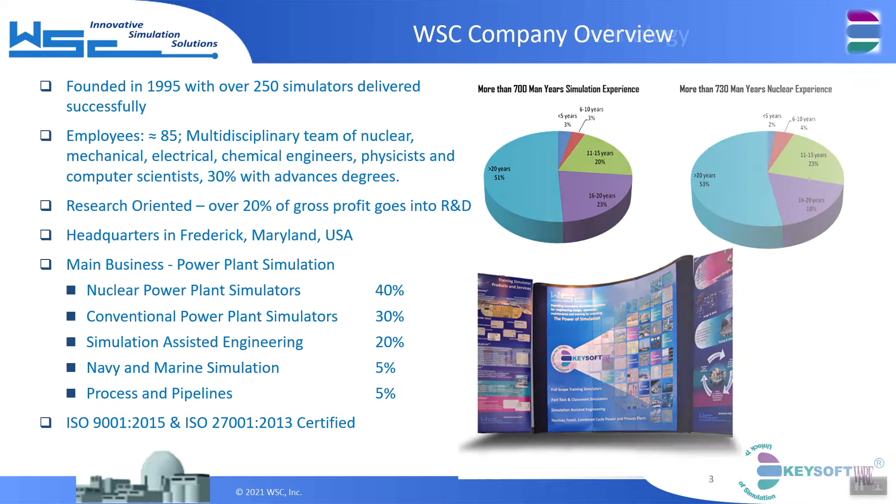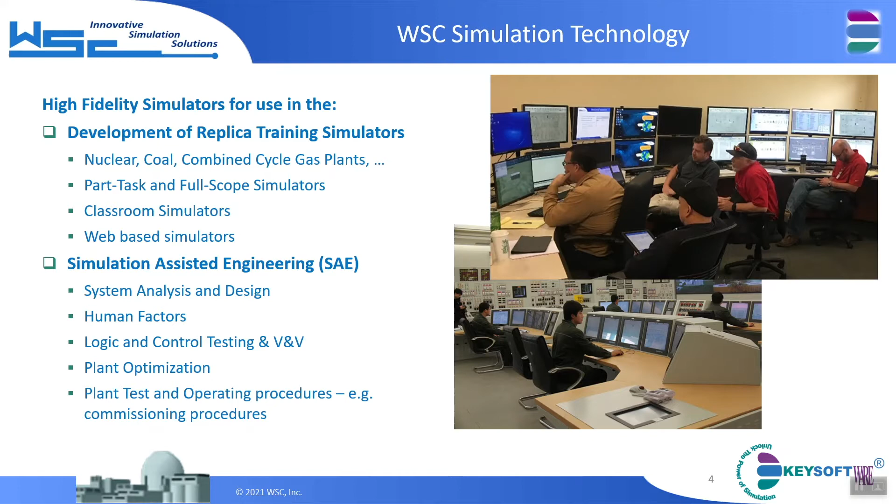Our business also includes the use of simulation in design. Companies such as GEH and others have used the simulator in system analysis, human factors, I&C, DCS, V&V, and plant optimization and procedure development.

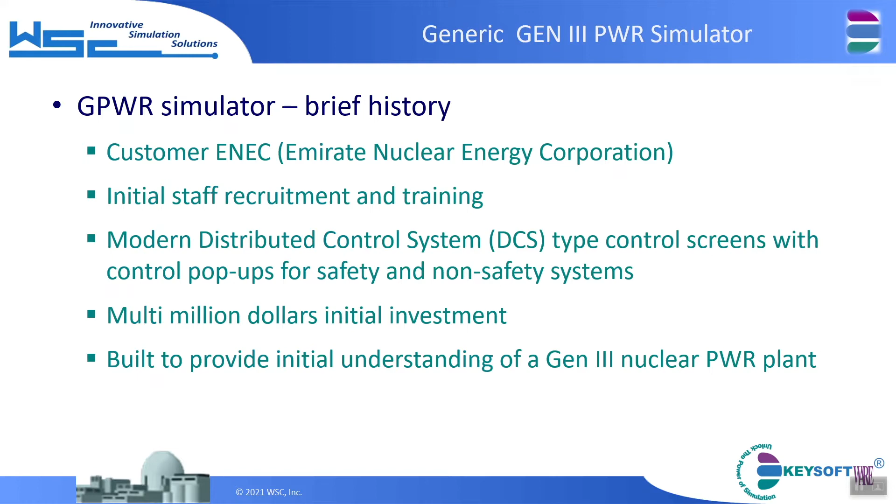The history of the Gen 3 PWR: we developed it for ENEC, NAWAH, in United Arab Emirates initially, with a multi-million-dollar contract, and this was due to them needing a simulator before their custom simulator, which was also built by us, was delivered. So we had to convert a traditional nuclear power plant control room into a DCS type control room. This was replaced by the actual nuclear simulator that you see here, and currently they have 4 of these nuclear simulators due to the amount of operators they are training.

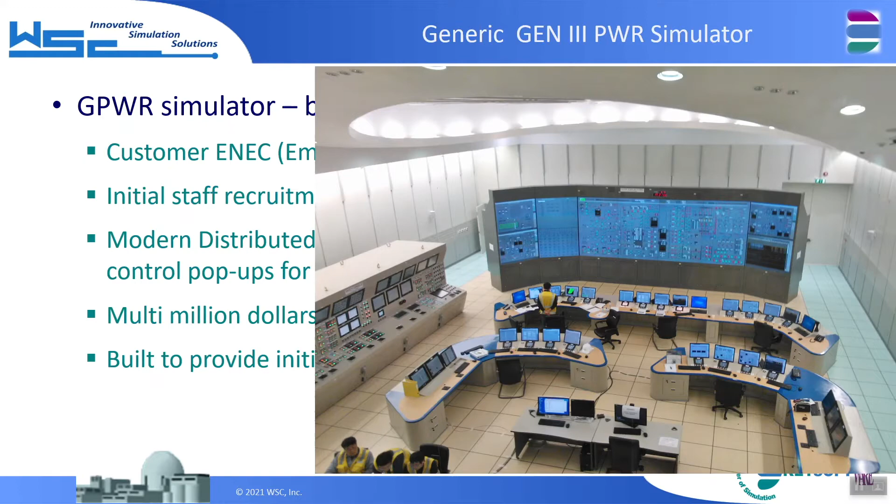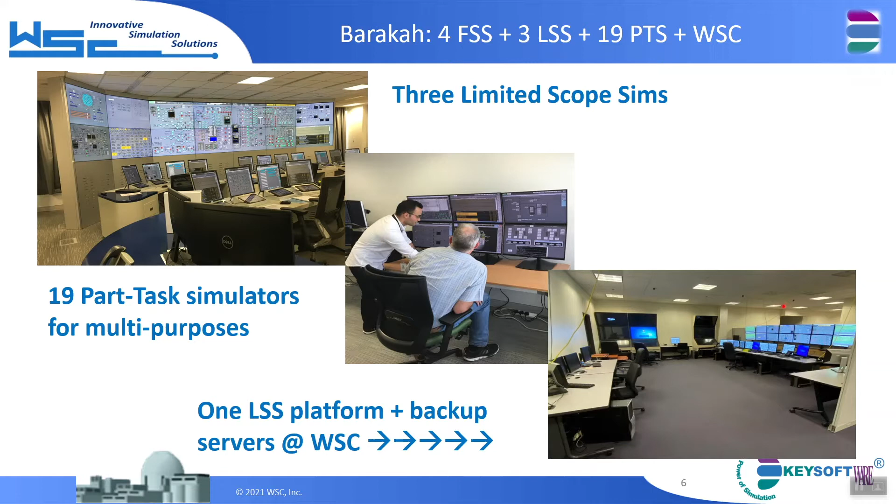For Barakah nuclear power plant, there are also multiple simulation platforms. There are limited scope simulators, which you see on the top left. There are engineering simulators called part task simulators that allow for system understanding and also debugging of issues in the plant. We also maintain a platform in WSC for them where we do upgrades.

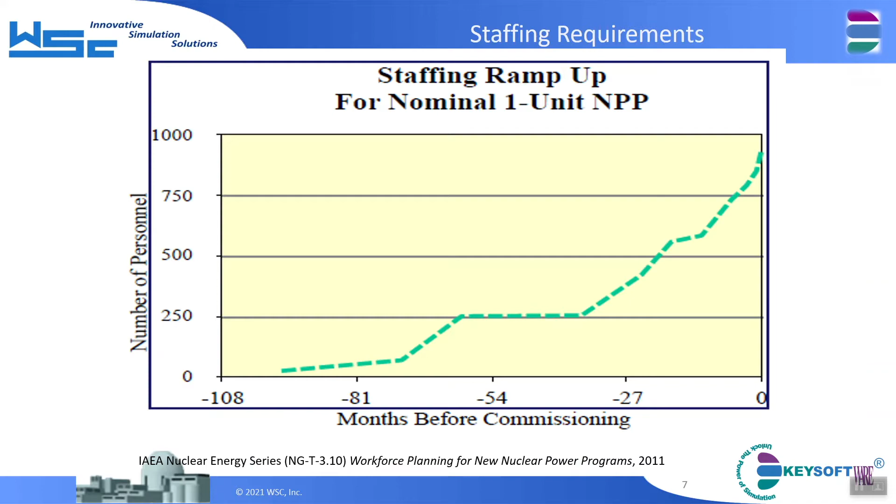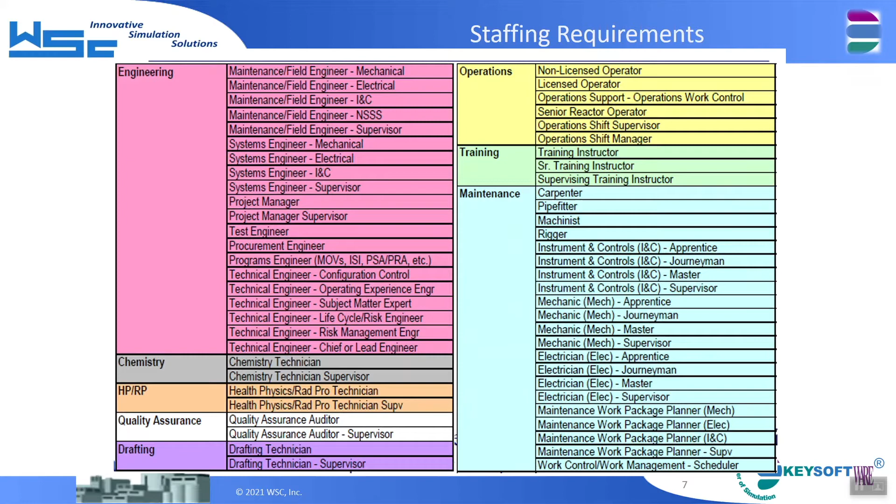And continue upgrading the simulator to the same state as the plants. One of their most problematic issues is that they had started the nuclear program and required hundreds of employees to be trained on nuclear technology. And it's not only operation, but engineering, even management and maintenance, etc. So that required ways of educating, recruiting, and getting the next generation of engineers into the nuclear industry in United Arab Emirates.

The capabilities of this simulator is that it is a modern Gen 3 control room. It provides a very good understanding of the nuclear systems and fundamentals, and it can take you to any component in the nuclear power plant and provides the ability to operate, control the plant, and look at transients, understand fundamentals of nuclear power, and introduce nuclear safety culture in the plant.

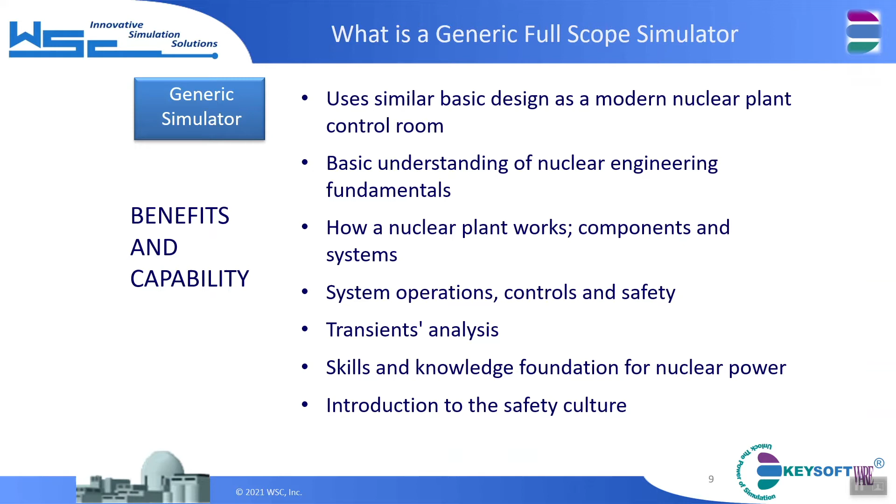What differentiates our generic PWR from others is that the controls of this generic PWR are all done through graphics rather than panels. What we have found through providing panel simulators is that students or operators have a hard time finding equipment in a panel. It takes years to understand a panel control room, whereas in the generic PWR it's very easy to access different systems, different controls within any system in the plant.

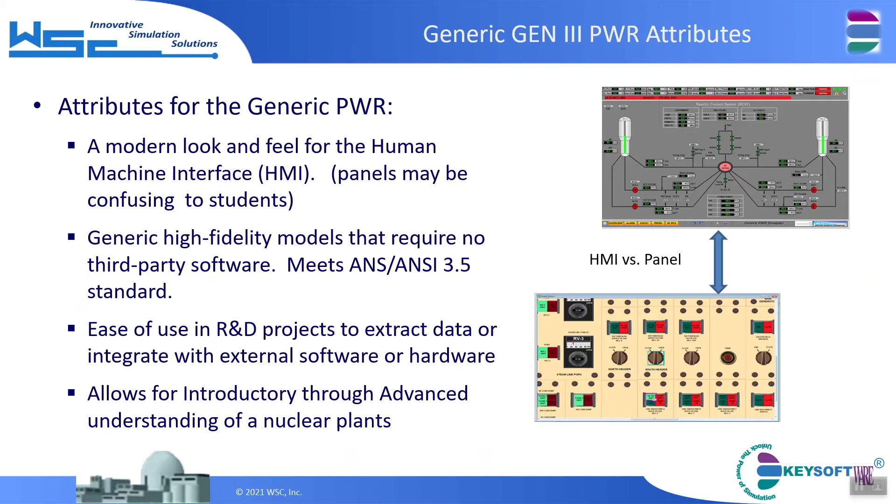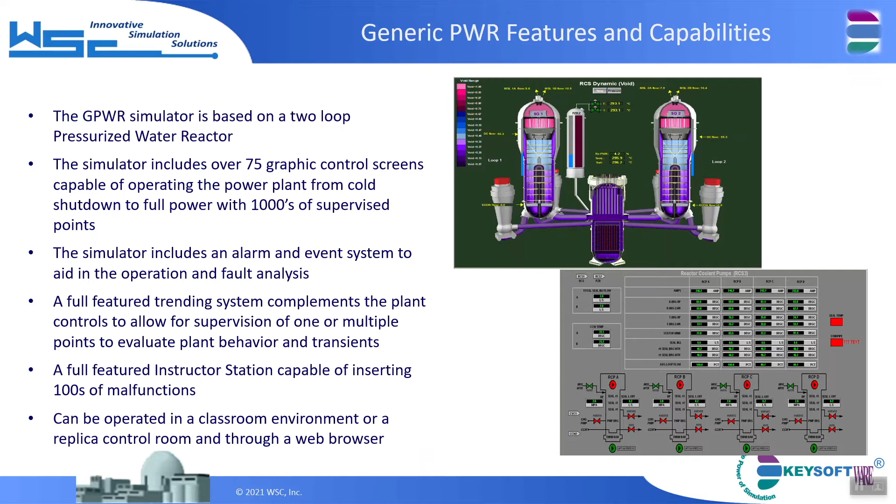The GPWR includes about 70 to 80 graphic screens that allow you to operate the system. It includes an alarm system, an event system, trending, a full instructor station, and it can operate in a classroom as well as in a single platform or a web-based delivery.

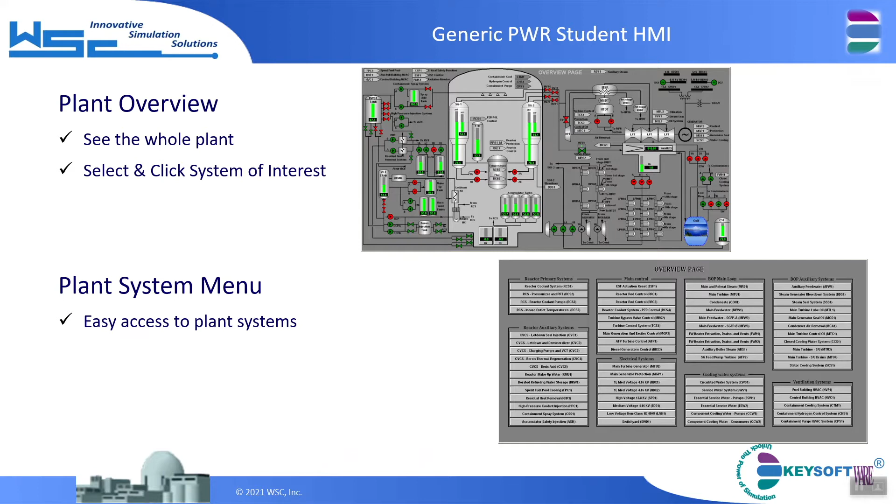Some of the plant overview screens: this is the top screen with the full view of the plant, as well as the screen with the menu taking you to any system in the plant.

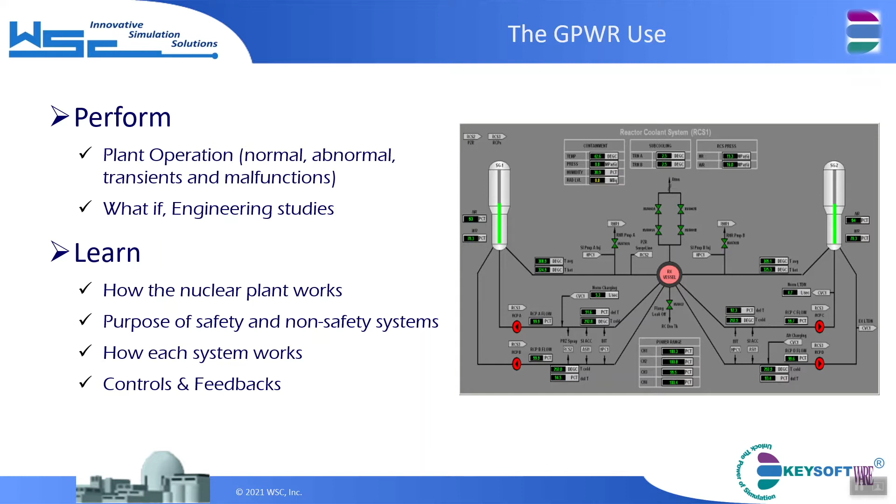The simulator is able to do normal operation from shutdown to 100% power and back to shutdown, but it also allows for malfunctions to be inserted and changes to the plant that are needed for various R&D or other applications.

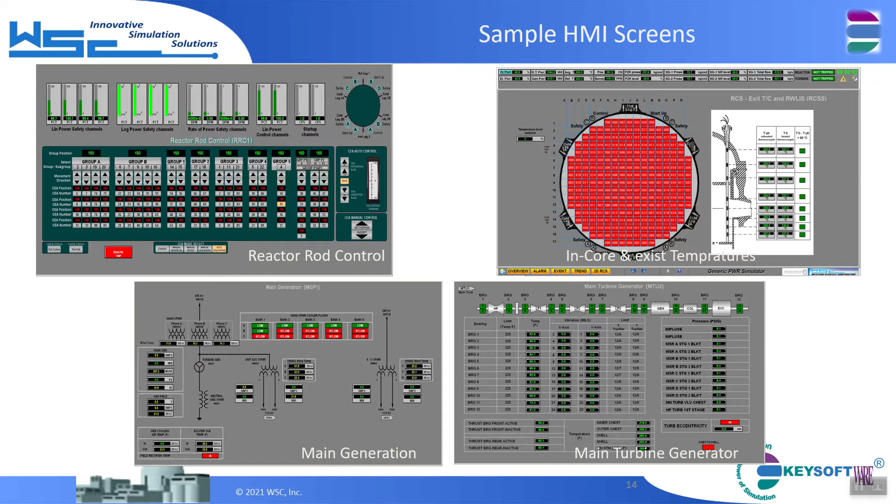Some of the HMI screens: this is rod control, in-core exit temperatures, main generator, and turbine generator vibration monitoring. It has an alarming system, an event system, and a trending system.

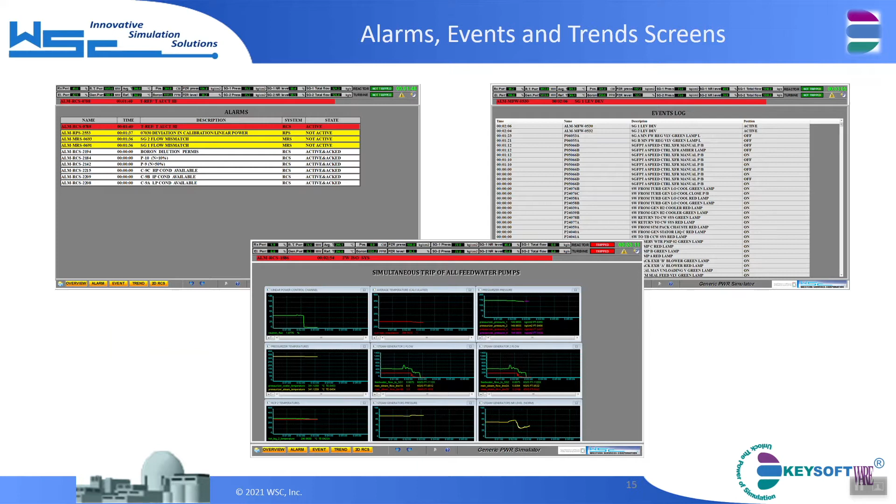And we added certain quasi 3D graphics to provide the user a view of void, pressure, temperature of the reactor, as well as the flux in the reactor through the 3D model that is provided. This model is based on NESTLE code, and it's a 3D full scope neutronic model.

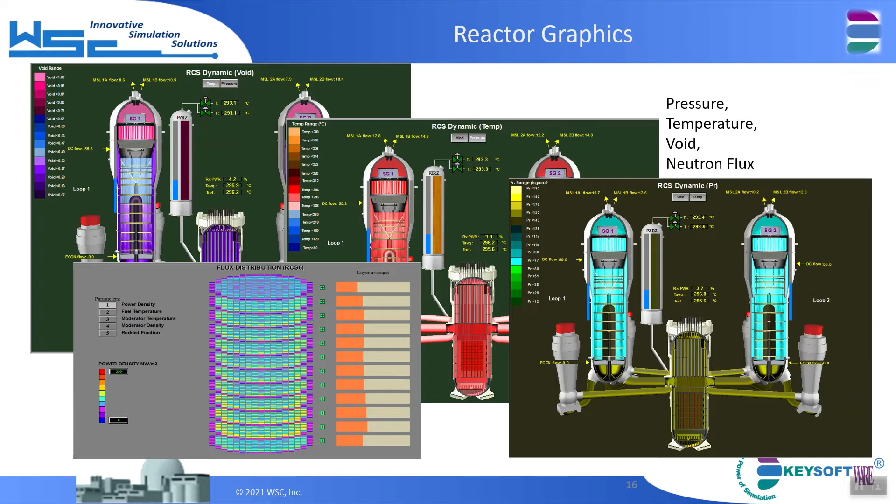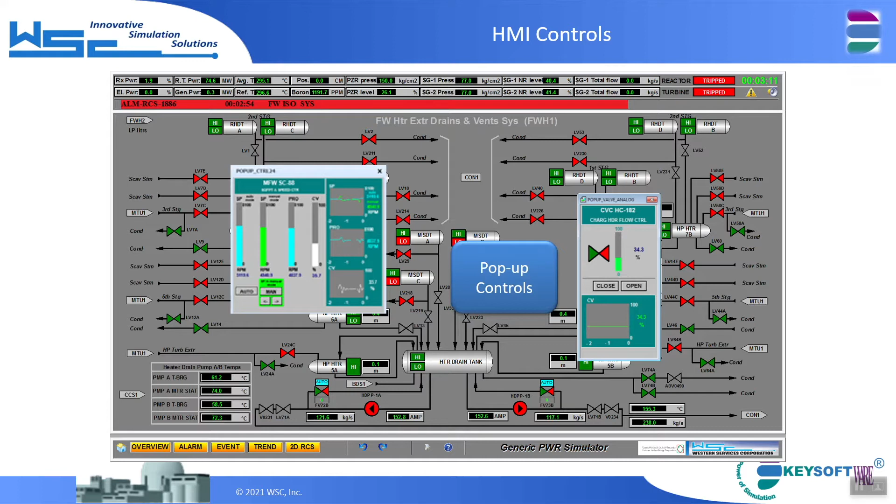The pop-ups are very simple to understand. You click on a valve, and it opens and closes. You click on a controller and you'll see the PID controller with its parameters, trended, etc.

Also, the simulator comes with a full instructor station, which allows for use of the simulator in training, and allows for insertion of malfunctions, snapping initial conditions, etc.

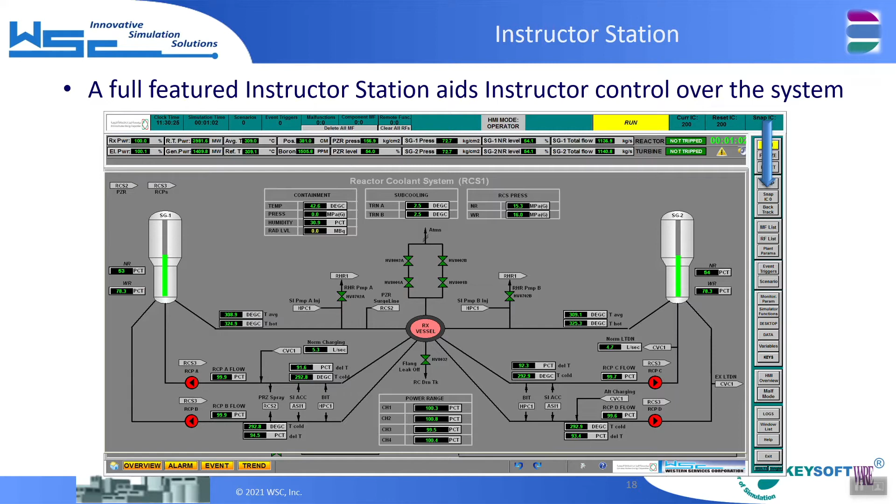This is some view of how this simulator was applied in a classroom. The top right is something we delivered through the IAEA, International Atomic Energy, a few years ago to countries that are starting to think of nuclear power as a source of energy in their country.

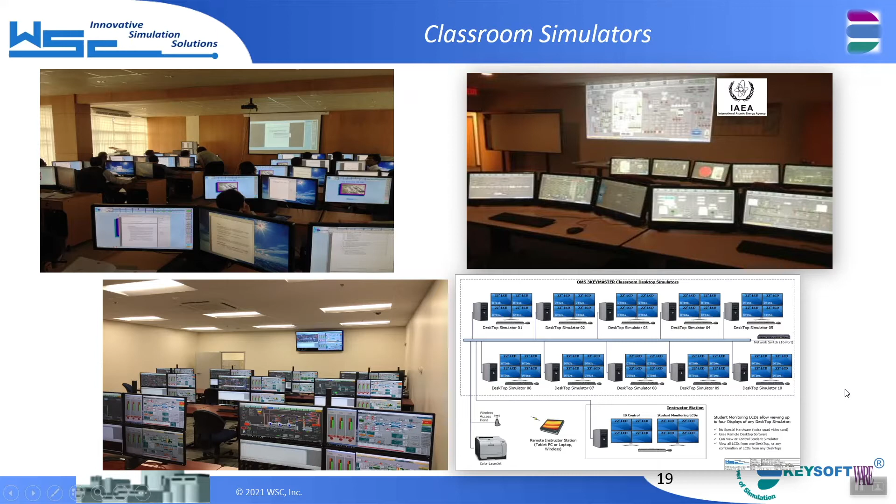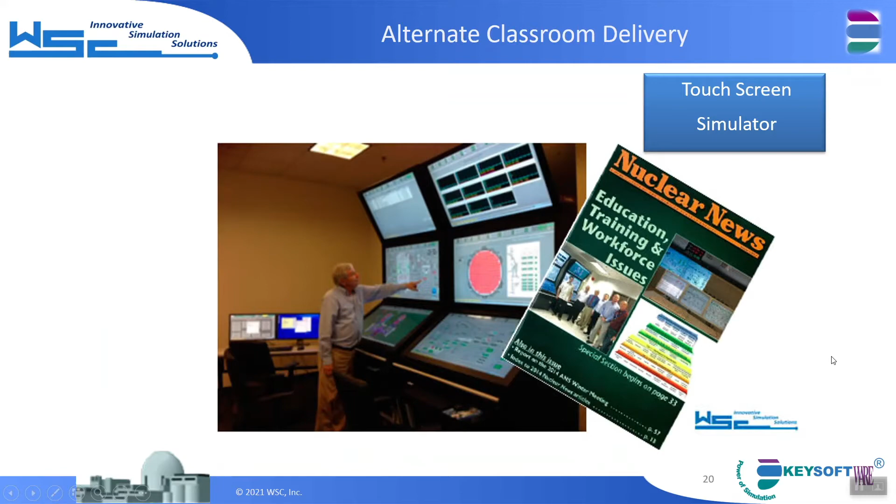We've also delivered the simulator on panels. These are called 3 key touch panels. We were on the cover of Nuclear News maybe a couple of years ago. Mr. Mirsha was one of the people in the picture delivering this simulator to a college.

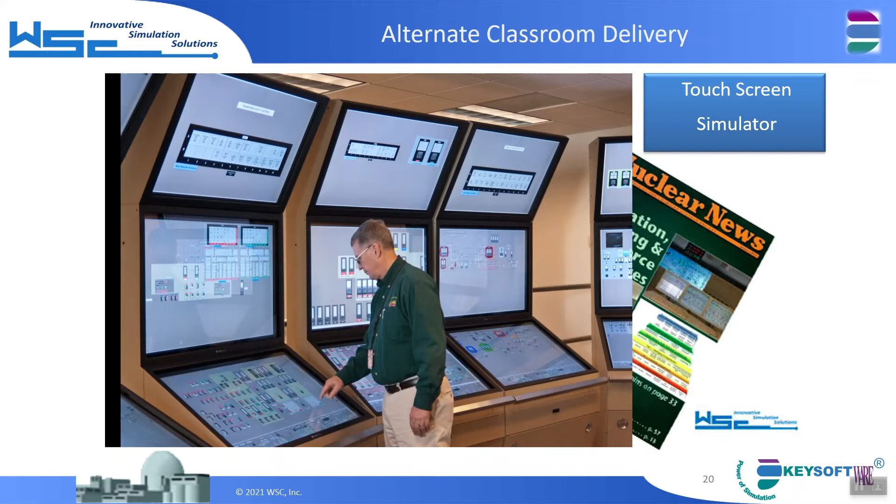We've delivered these touch screens on traditional control rooms, such as this one, which is Palo Verde. In addition to that, we recently have been delivering this on cloud computers, allowing students to access the simulator through the internet.

The color scheme that you see with yellow, green, and red just indicates that different lessons can be run by different people. Access to these lessons is independent of what lesson you are taking.

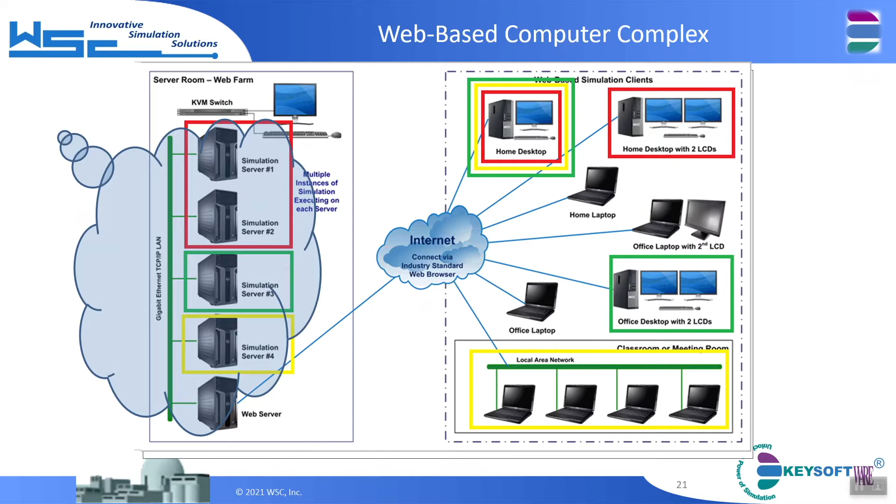Where the simulator is sitting today, some of the organizations that have it and use it, whether it's on the web, local computers, or a classroom environment - these have been various ways of delivery. Some of them have been also for R&D purposes, where the simulator is being used for certain research and development.

What we deliver with the simulator is this 3KEYMASTER simulation environment, which includes all the modeling tools, a two-phase flow-based network, an electrical network, a logic control, as well as the DCS HMI and Instructor station. It includes the Nestle code for the neutronic reactor physics, and it's available in various versions.

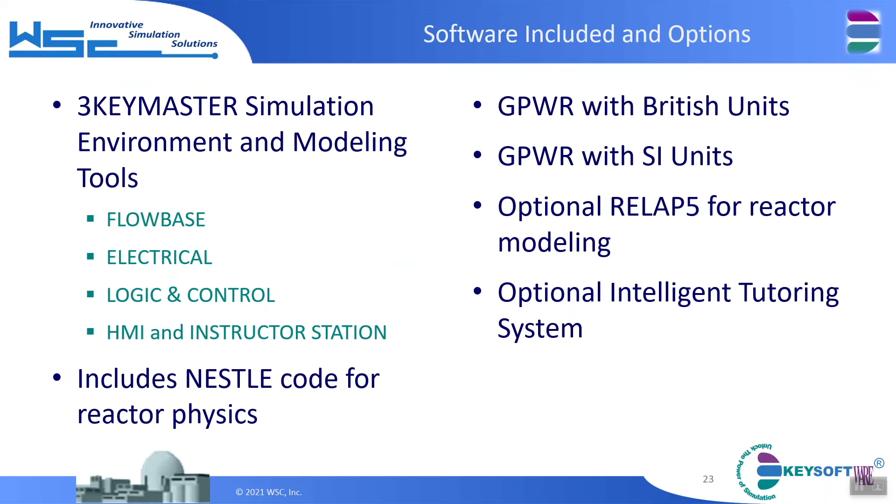The GPWR has a British units version, an SI unit version, and optionally we can provide it with RELAP 5 as the thermohydraulic code, along with what we call the intelligent tutoring system, which we will demo later in this presentation. So the simulator can be provided in a single machine for use in R&D or control.

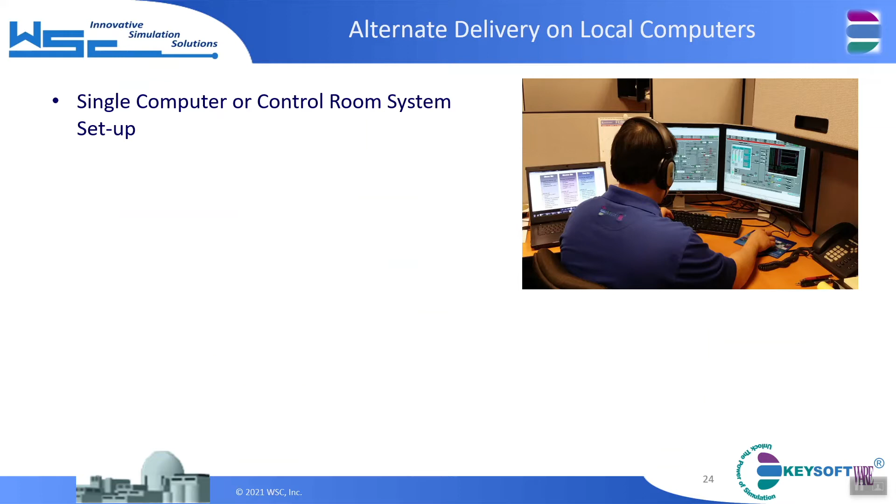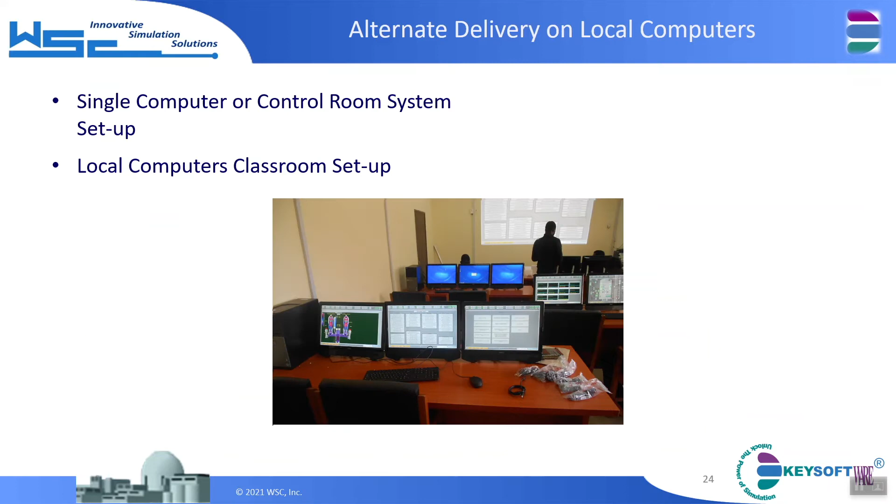Or a control room setup such as this one, or a classroom setup, or through 3-key touch units, or a combination of both. This picture comes from Sharjah University in the UAE, where they have a classroom and the 3-key touch units. 3-key touch units are usually used by the instructors to provide feedback to the students.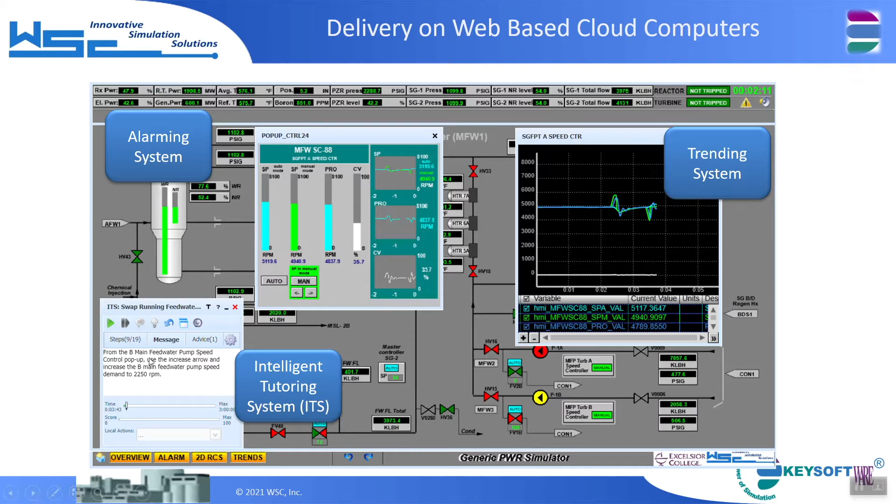The latest delivery through the web allows you to have access to it from anywhere in the world, including functionality such as trending and control. So you could actually do a startup of this plant through the web and see alarms and listen to the script of the lesson through the intelligent tutoring system.

The intelligent tutoring system was developed a few years ago under an EPRI contract and has been used recently in our web applications to deliver lessons through the web that are scripted, allowing someone to come into the web and follow instructions for the simulator.

With this, I'm going to turn it to Majid, and he will do a few demos for us. Basically, he will go through the GPWR functionality and take you to the GPWR on the cloud and show the ITS capabilities.

Greetings. To start the GPWR, I basically log in. I can log in as a developer, where you have access to models to make changes to the GPWR models, or you can sign in as an instructor, which allows you to control the simulator and/or operator students, and so on.

And if I select the instructor, the simulator is fully up and ready to be used. I go ahead and run. If I bring another...

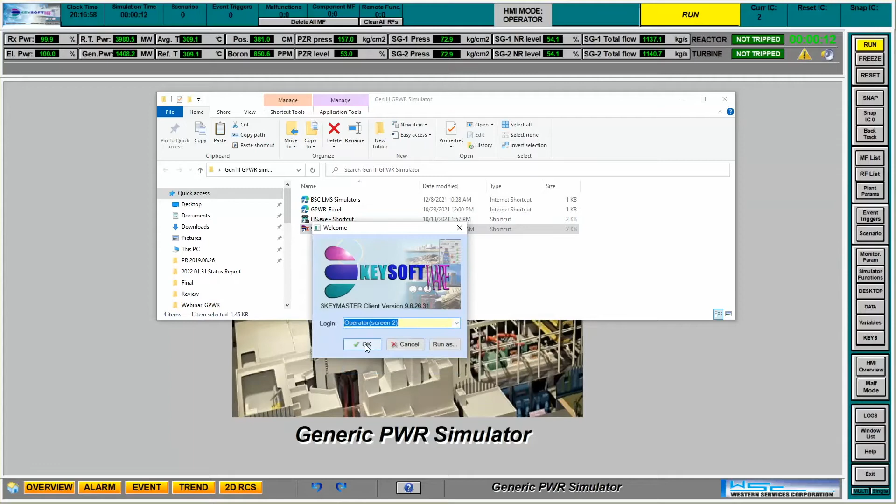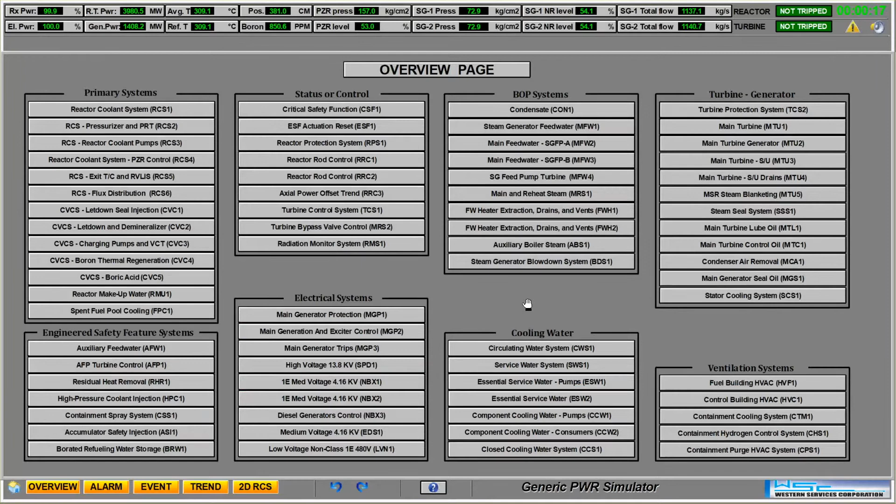If I sign in as a client or as a student, I can connect to this simulator. For example, if I select this, I bring another HMI that I can control the simulator from. You can open up as many of these for teamwork or in a classroom environment.

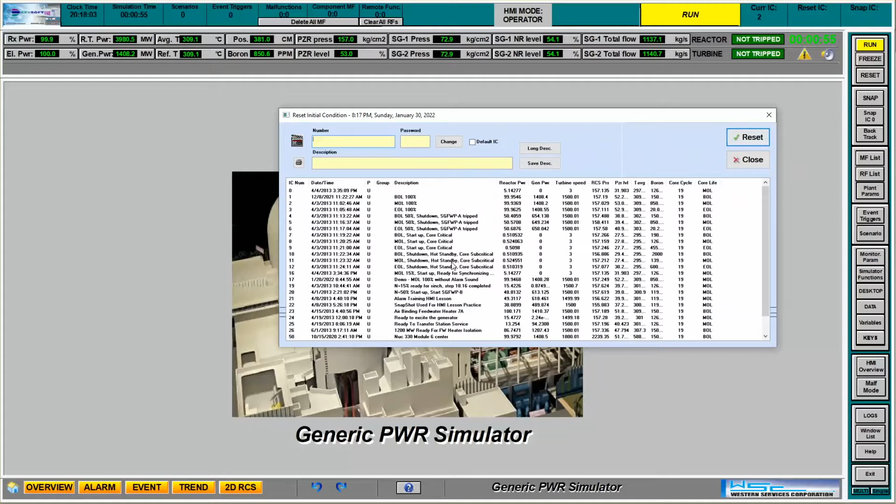Now, if I choose the initial conditions of the plant, there are many initial conditions, or we call it ICs, provided for different core lives, but you can snap any initial condition that you like for running your own scenarios. I reset to an initial condition which has no alarms.

No alarm sounds basically, and I'll choose an overview, put the simulator into run.

The middle is the main HMI page to operate and control the plant. The important parameters information are here. So you can see the status of the plant, and whether reactor and turbine are online or not. And here you can see if you are running scenarios or having malfunctions, leaks, or component malfunctions.

Here there is a facility basically - to the right is simulator control and facility for instructors and the users. And on the bottom there is a home, a menu, a list of HMIs, and there is alarms, events, and trends, and 2D primary system presentation, which I'm going to show some of these to you.

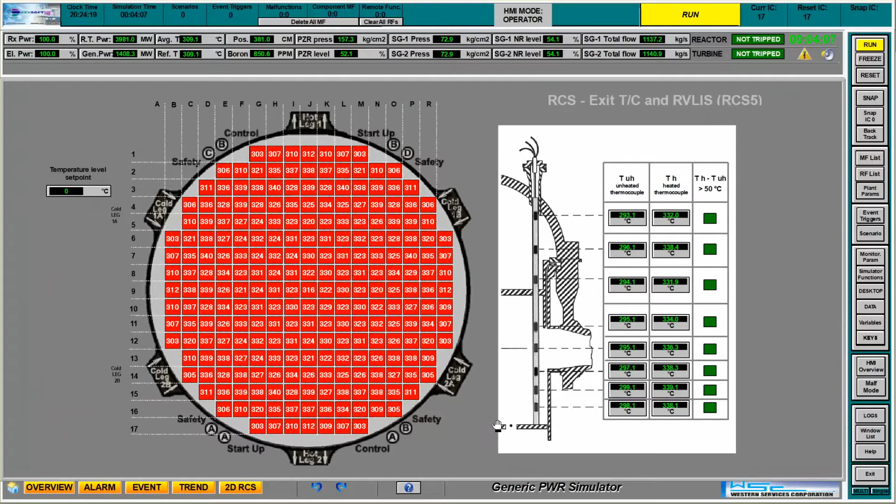Clicking home, you will see basically all the HMI pages are organized by their systems or functions. Like these are the primary systems, controls, and statuses, balance of plant system, turbine generator, safety, electrical, cooling water, and ventilation. So from here, you can click on diagrams to HMIs and operate.

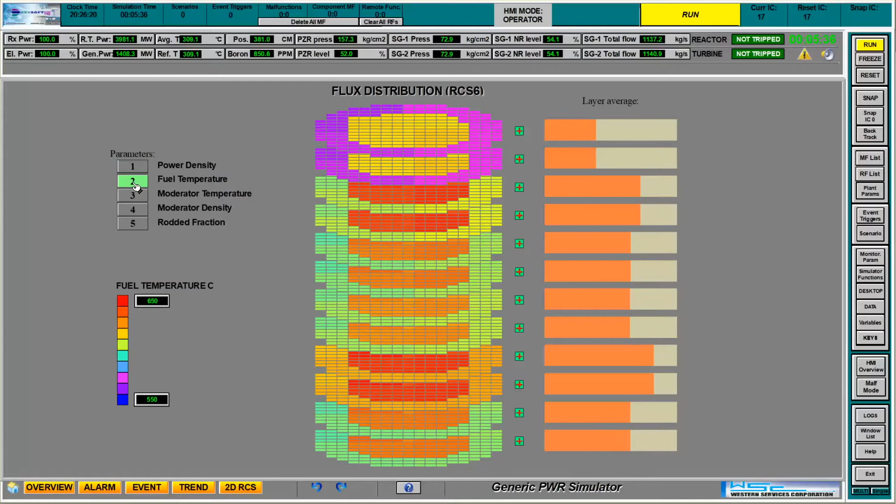For example, the flux distribution - what you're seeing here, basically, we're using Nestle core modeling. So every one of these nodes is calculated in the core model. That's the flux shape, in the middle of life core. You have the power density indication, fuel temperature, moderator density, and then a rodded fraction, meaning all the rods are out of the core.

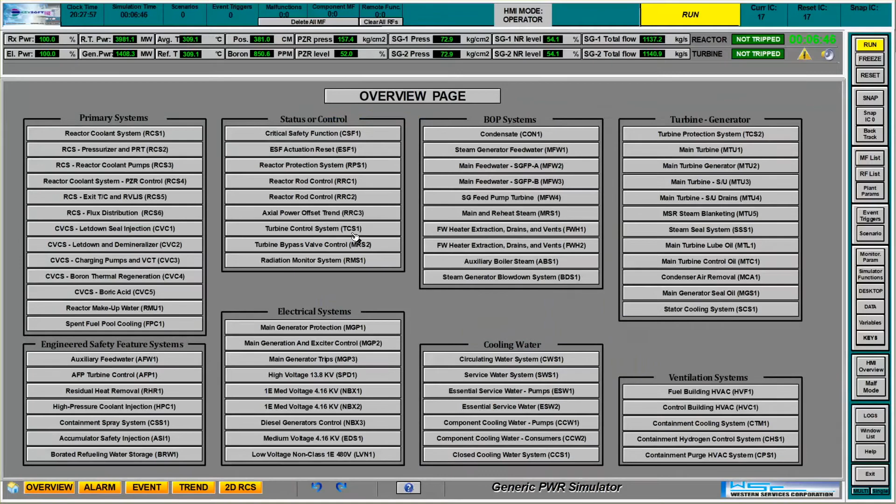On the controls, I'd like to show the reactor rod drive system or reactor rod control. Right now we are in automatic. If I select manual group and group 3, I can insert the rods. You will see the rods are stepping in. And if I trip the reactor, you will see the power indications, and you're also going to see the rods getting inserted in the core.

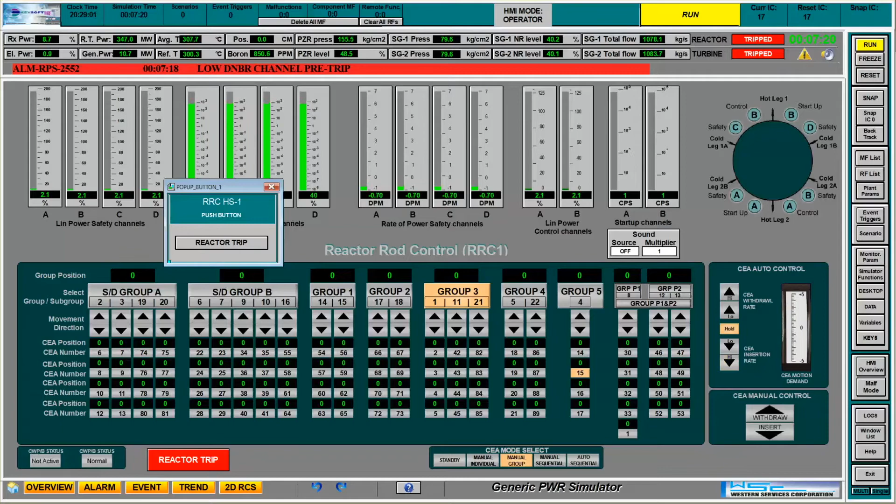So if you look at the trends, for example, you will see basically the trends indicating that the reactor has tripped. Resetting to 100% again.

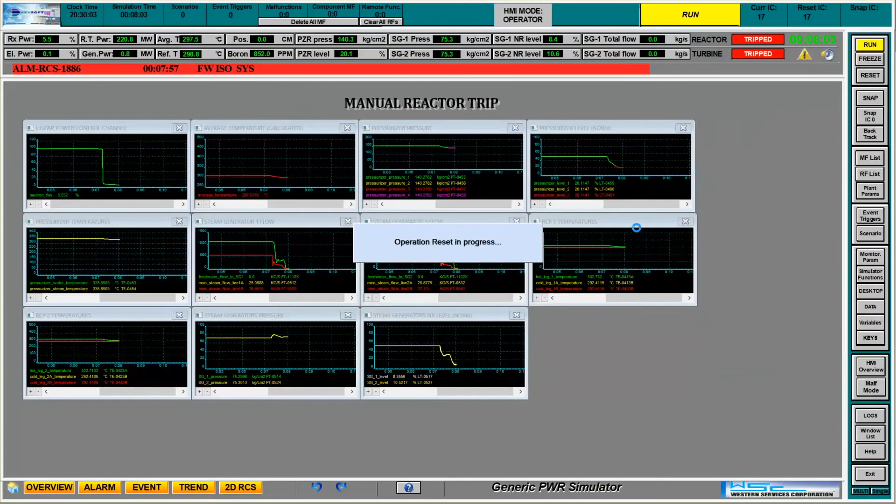Show you the backtrack. Basically, the simulator is snapping automatically initial conditions based on user specified interval. So if you're running a long scenario and you want to go back in time to show the students or observe yourself the situation, you may go back in time.

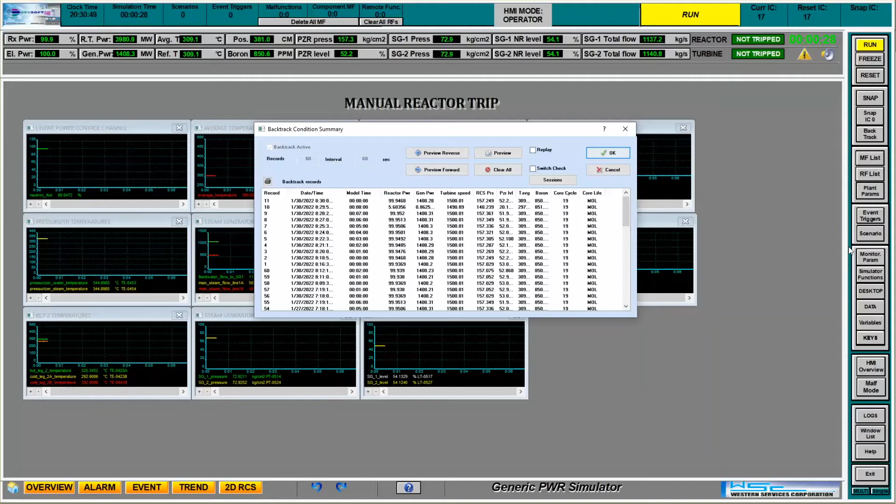We have a very good 2D representation of primary system, a good visualization of the primary system.

Let's insert a malfunction, loss of coolant. We go into the malfunction list and select primary system malfunctions. If I select the cold-leg break and put, let's say, a delay time of 5 seconds, ramp time of 7 seconds, and the final value being 50% break, you will see that it's counting down by 5 seconds, and then the malfunction gets inserted.

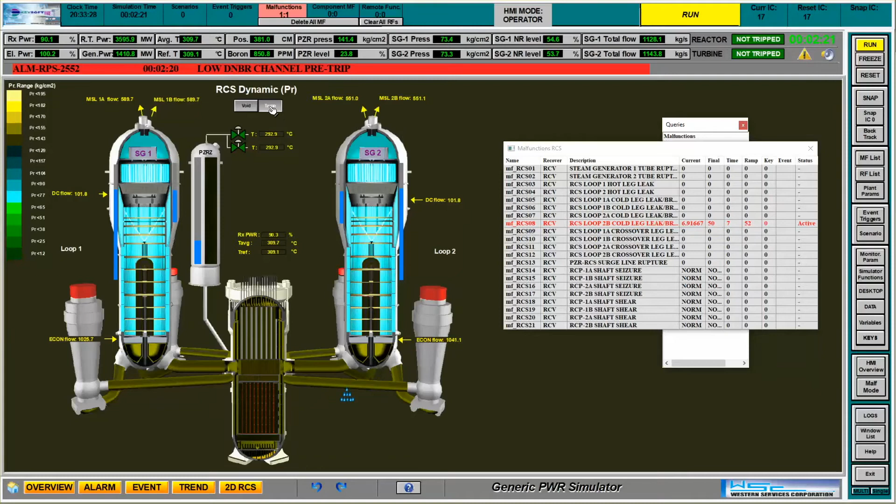The malfunction is here in the cold leg. You will see that the pressure drops in the primary system. You will see the temperatures are changing in the primary system accordingly, and the void.

Another function that I wanted to show you - the user can make a list of parameters that they are interested to look at for different transients, and we call them monitor parameters. So if I select a few of these, for example, I can trend them.

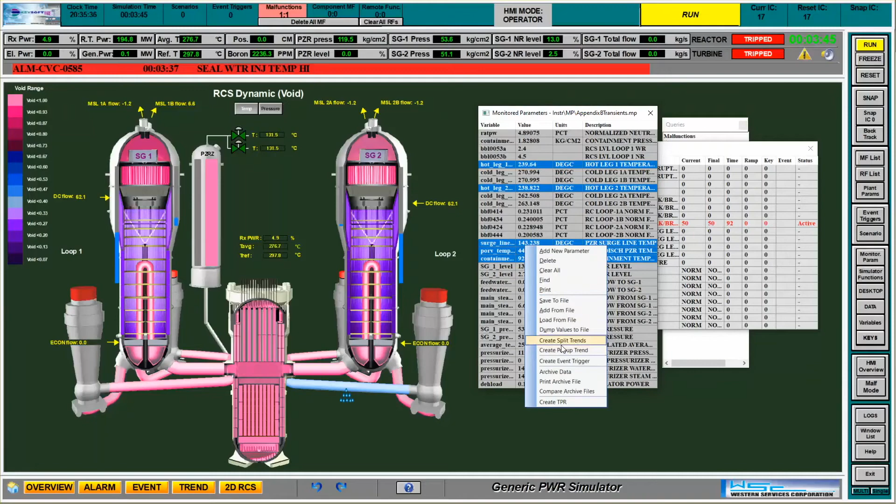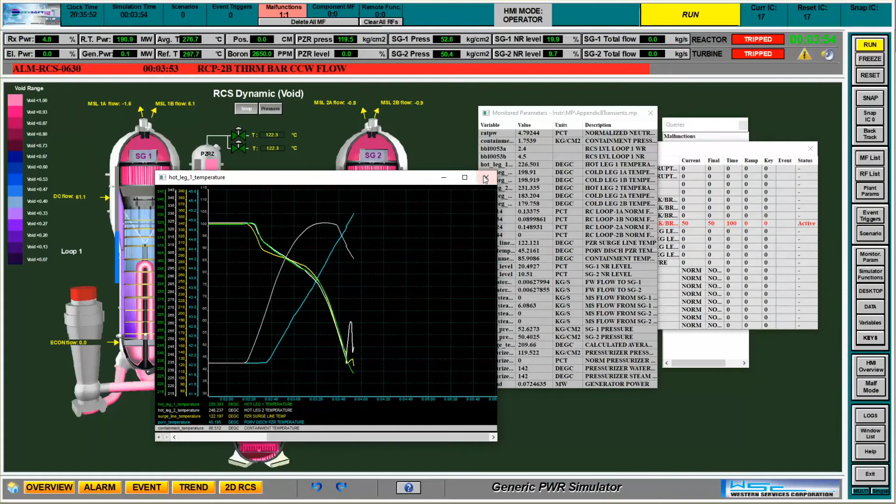We call this a pop-up trend. You can also trend them as a split, or you can dump the values to a file for analysis, or to save the files, and so on. So there are so many functions of the trending functions.

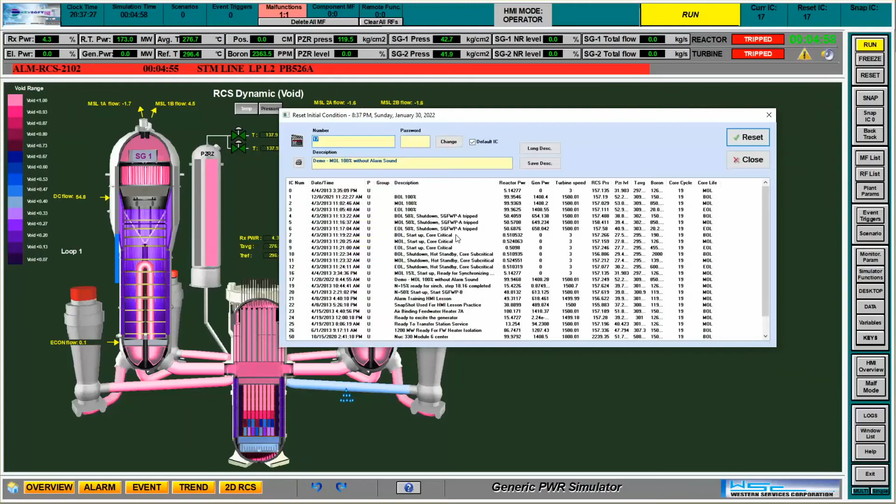Reset the simulator again. And this time we'd like to discuss scenarios. There are scenarios that have already been set up and provided with the GPWR, but you can basically make new ones or capture the scenario as you're running it, and you can rerun that scenario later.

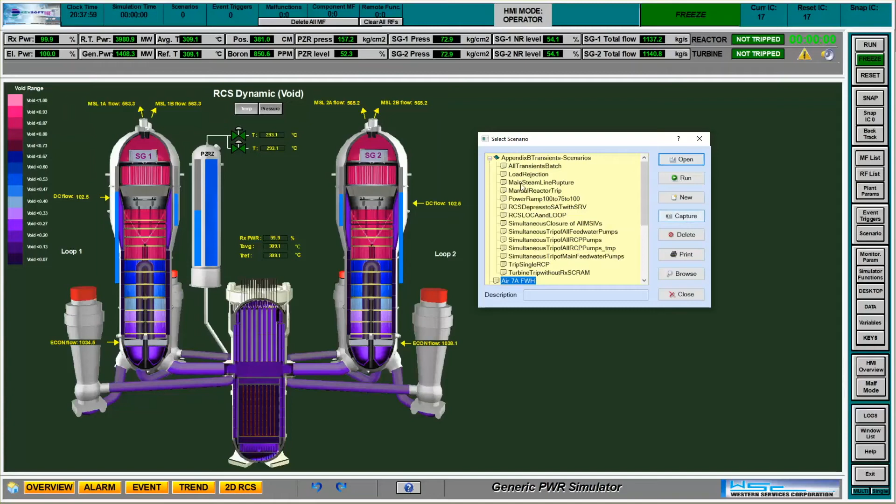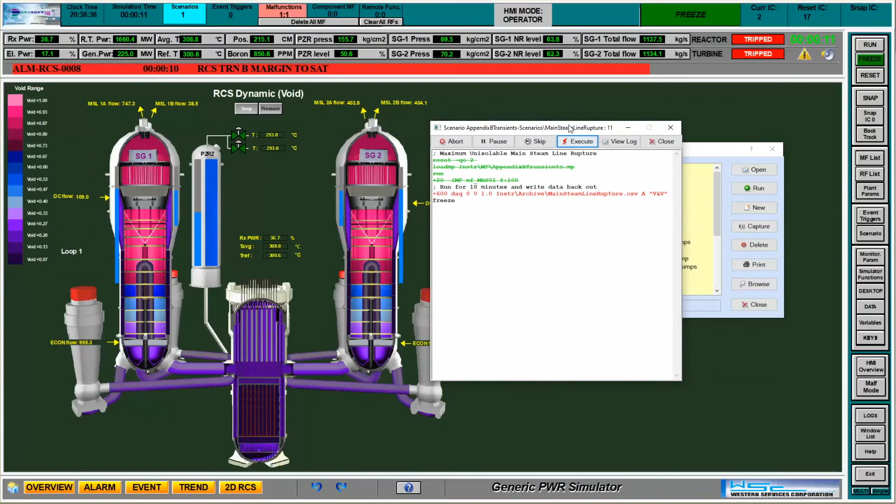If I select the main steam line break rupture, that's one scenario we set up, and I run that. It shows that one scenario is inserted. There is a malfunction that's at 20 seconds. I can execute it. This was an initial condition that had this alarm sound in it. Anyhow, the malfunction got activated, and we have a main steam line break.

Another function I'd like to show you is selecting malfunction mode. You basically see all the malfunctions that are available on the HMIs. For example, here you can have feed water header break. You can insert the malfunction from the P&ID. And then you have component malfunctions for valves and pumps and transmitters and so on.

So if I select this transmitter, which is a steam generator narrow range level indication, if I select one of the transmitters, I can, for example, introduce some noise into this transmitter.

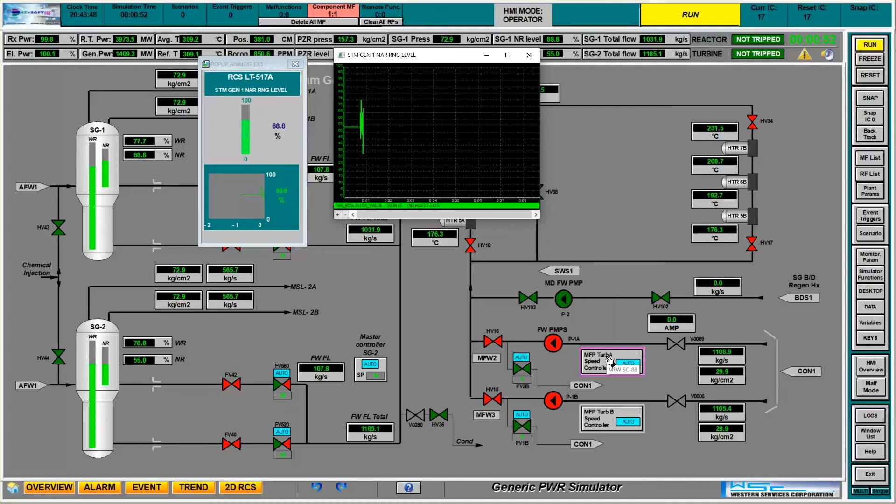And you basically see noise indication on it. Shows in here, shows also on the transmitter itself. And feed water level control is trying to maintain the steam generator level. You see, this noise has affected the controller itself.

Another capability that the simulator has: you may run the simulator in slow time, normal, or fast, and you can also increase the xenon and decay heat by 1,000 times. Run it fast, and you can silence the alarm.

There are many features here that I cannot cover due to the limited time.

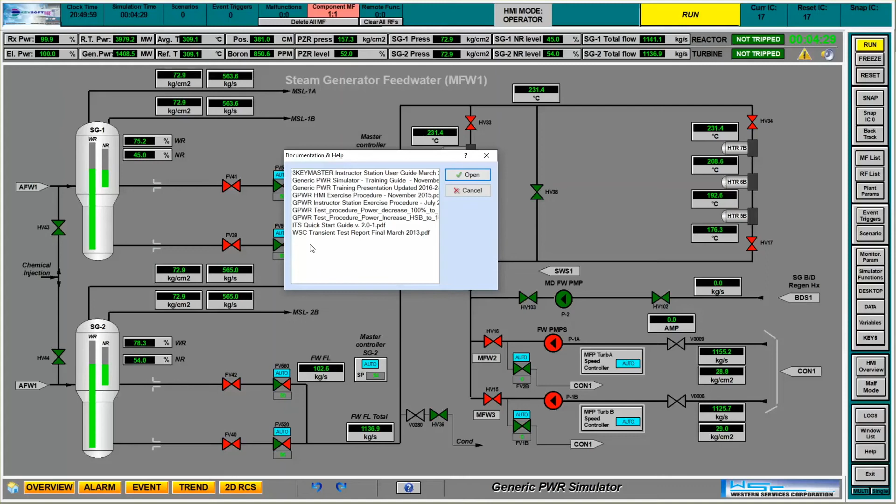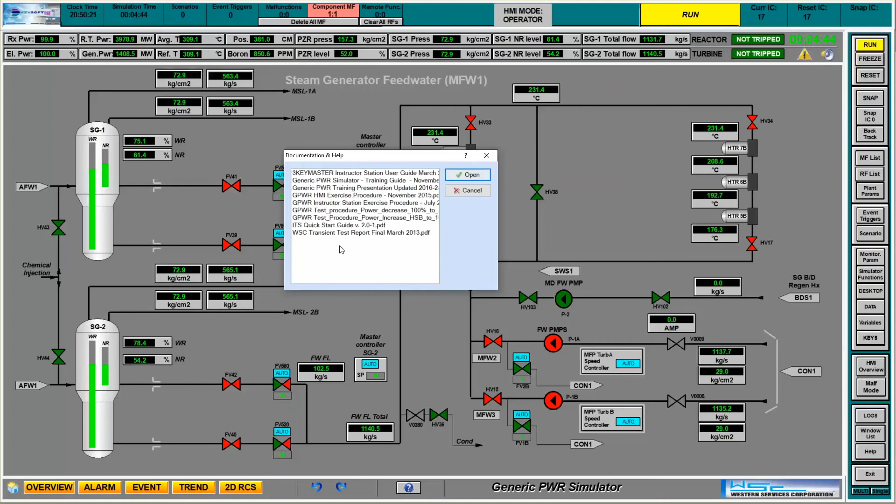So if you click on help, you basically open up the list of documentation that is available. Instructor station user guide describing all the functionalities for the instructor, or how to control and use the simulator. Then there is a training guide for the GPWR itself, and training presentation. There are a bunch of exercises also, and then there is a start and shutdown procedure for the plant, and there is an ITS, Intelligent Tutoring System, guide, which will be described later. And then we have the Transient test report, which has all the ANS 3.5 standard transients, and it shows that the simulator meets that standard.

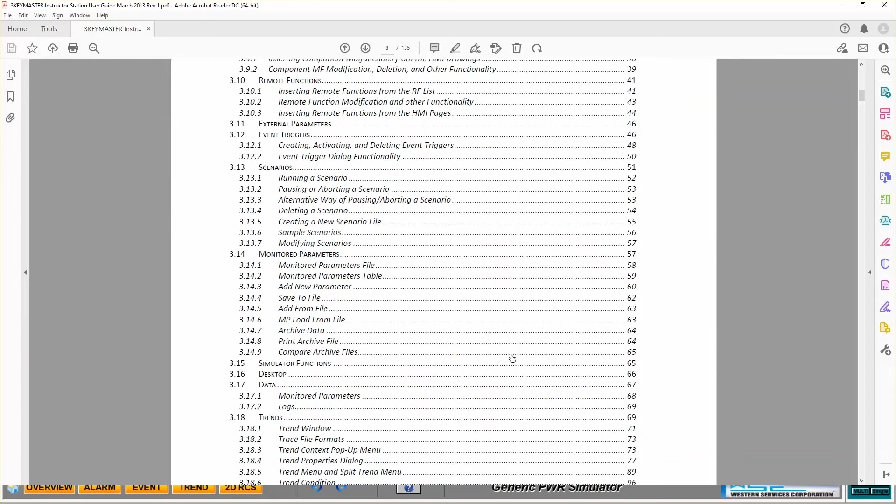If I click on the instructor guide, you basically see the user guide and how to use the simulator - running scenarios, inserting malfunctions, how to use the trends, and so on. So if you go in the middle, you basically have everything that you need to control the simulator.

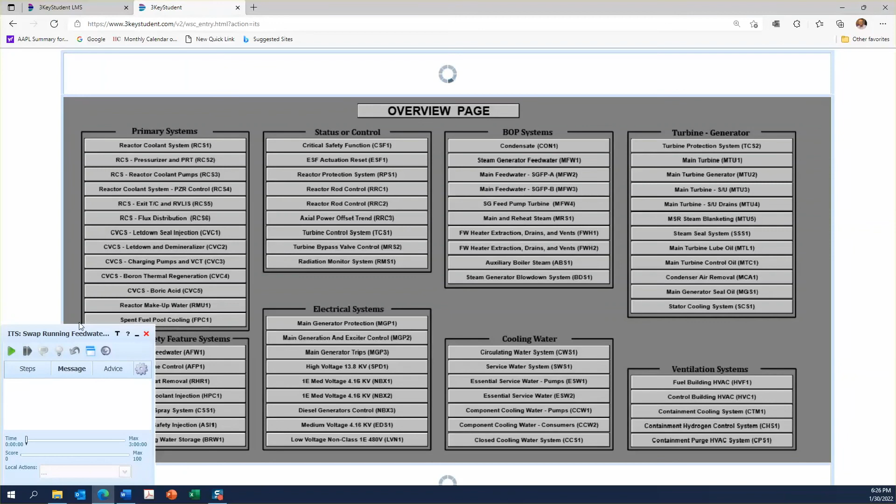Another school has a slightly different login. You basically get to this window where you can select the lesson or module that is set up for students to practice, and you enter. We use this ITS window to give some instructions to the students who are coming to the web. Of course this can also be used locally, but I will run the simulator now.

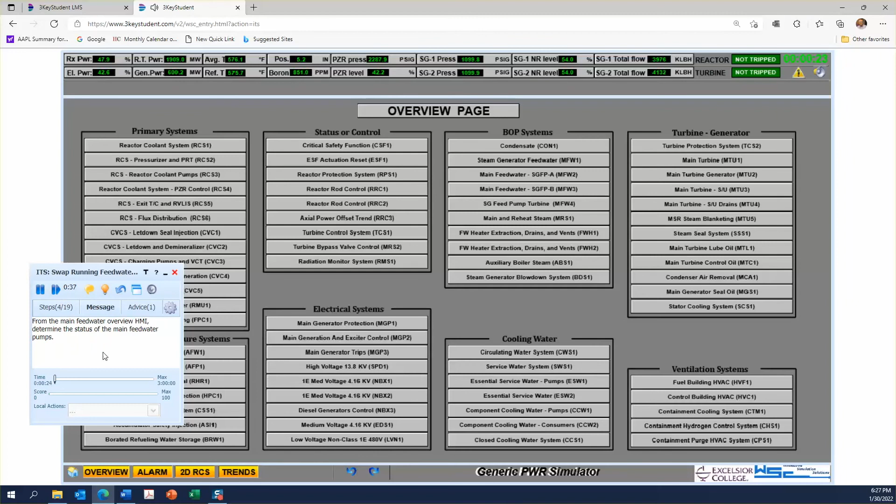And the lesson starts. Using the critical parameter status bar, verify the current plant power. I click on Advice. The unit is operating at 48% power with the steam generator water levels at a normal level. Using the main feedwater overview HMI, determine the status of the main feedwater pumps. As shown on the HMI, the A main feedwater pump is operating in auto, controlling steam generator water levels, and the B main feedwater pump is warming at 1125 RPM.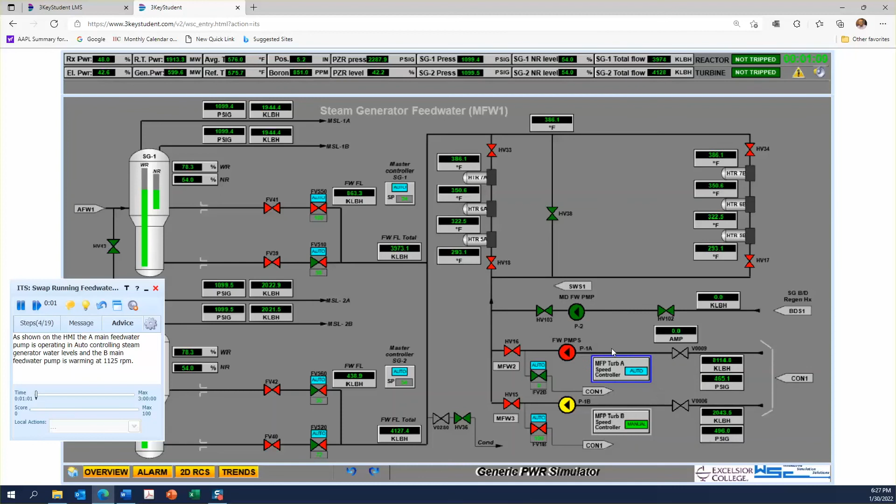I mute the sound. You see that basically the Advice feature will bring up the HMI that the student is supposed to look at, and also highlights the icon or item that they're supposed to look at. In this case, they're supposed to look at this controller for the steam generator level controller. So that's basically what I wanted to show you.

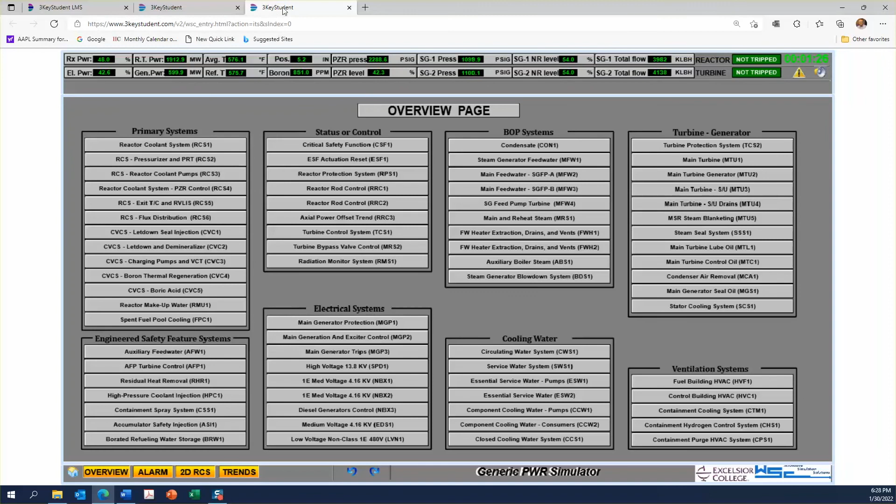And another beauty of the cloud system: if you have more monitors, you can open more windows. So right now I have this and that which are connected, running the same clock, and you can separate them and put them in another window. So right here, I can basically place that in another window and use it. Thank you, this is the end of my presentation.

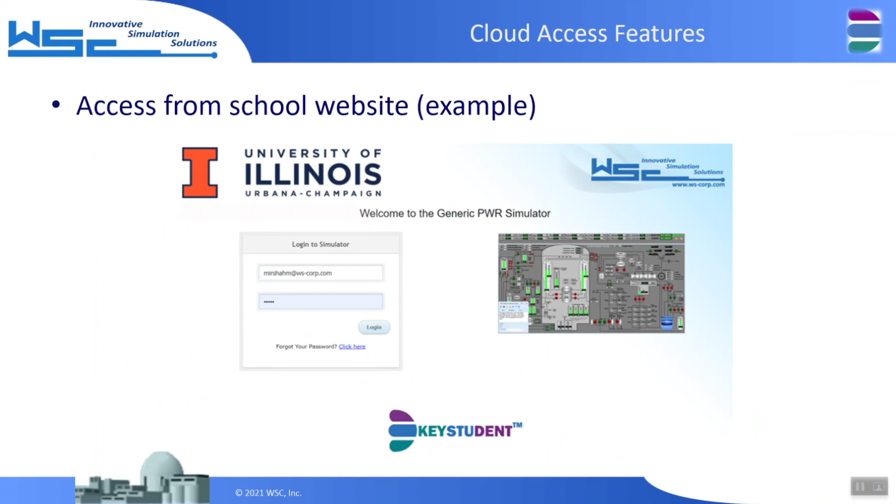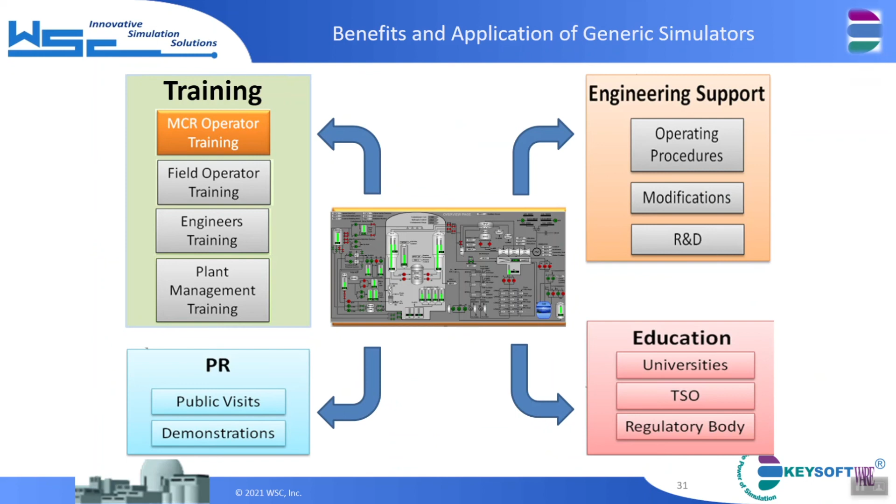This is a sample of a website that the students would access and how they launch the simulator. The simulator can be used in training, engineering, education, PR, and it has been used in all those areas. It's convenient, it's available, it's always there, with minimal upkeep once you have it up and running.